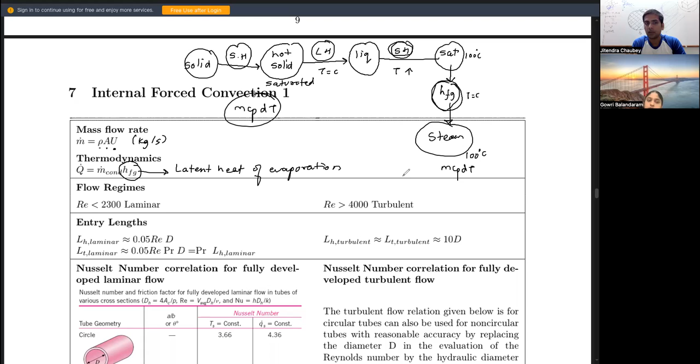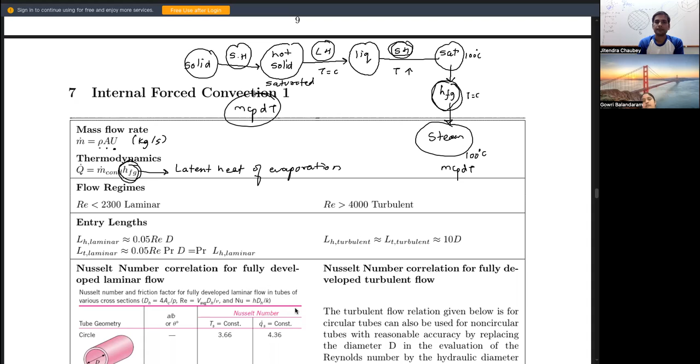Do you guys have a steam table to solve such numericals? There is a standard table called the steam table, used to find the values of HF, HFG, and HG. No, we don't have that. This value of HFG is actually obtained from a standard table. But I think maybe it'll be given during examination. No, it is usually given; most questions give us the values. So maybe they will directly give you the value of HFG.

So this was about latent heat of evaporation. This latent heat of evaporation, for 1 kg of water to convert into 1 kg of steam at atmospheric pressure, is actually 2257 kilojoules per kg.

Once it comes into numericals, we will discuss it again so that it becomes clear. Was this used in the tutorial questions? I haven't gone through them. We'll see. Since they had given the formula, I just assumed that maybe there is one.

So this is about this thermodynamic term. Then flow regimes, they have given us the benchmark for laminar flow as we discussed last time. Any Reynolds number less than 2300 will be treated as laminar flow, whereas beyond 4000 it will be treated as turbulent flow.

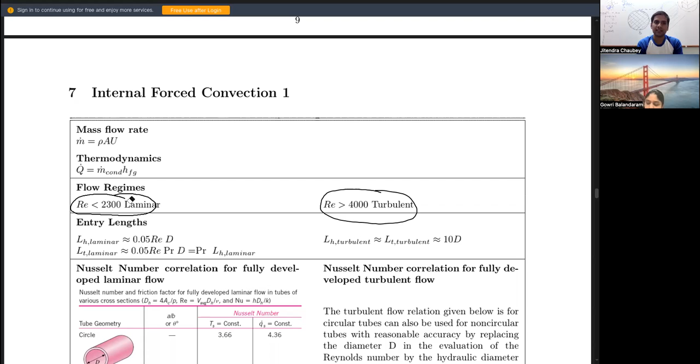Sometimes in numericals, if they mention that Reynolds number less than 2000 is laminar flow, we will consider that. But since they have given you 2300 here, I don't think they will give a different value.

This is entry length, or entrance length. The entry length is the length over which the fully developed flow is generated, where the velocity profile becomes parabolic.

So they have given us some formulas for laminar flow and turbulent flow, in terms of Reynolds number and diameter. Why have they given us three formulas? H stands for? I'm not sure.

Why have they given us the abbreviation of H and T? How do they differ? This is in the form of Prandtl number, this is in the form of... Will you be having these values or formulas in your examination? Because it's not easy to by heart them, not easy to mug up and remember. I don't think they follow exactly that, but they have formulas that you need to know.

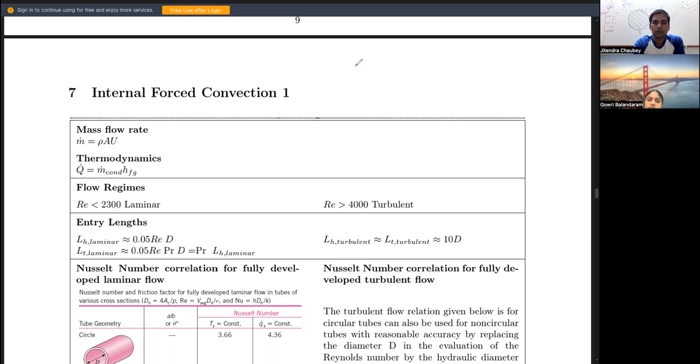Can I just show you the exam paper formula sheet? Yeah, it will be good, like more or less what it would look like. I think it will be this because it's a past year paper. Just give me a second.

This is what they gave in the paper. What I think is this H is basically for hydrodynamic, whereas T is for thermal. Because if you recall, we had discussed in the case of the tube, about the surface temperature and the fluid temperature, and then we generated a parabolic profile. Even in the boundary layer in the last lecture, we made a velocity profile for hydrodynamic, that is velocity, and at the same time we made the same parabolic profile for the thermal boundary layer.

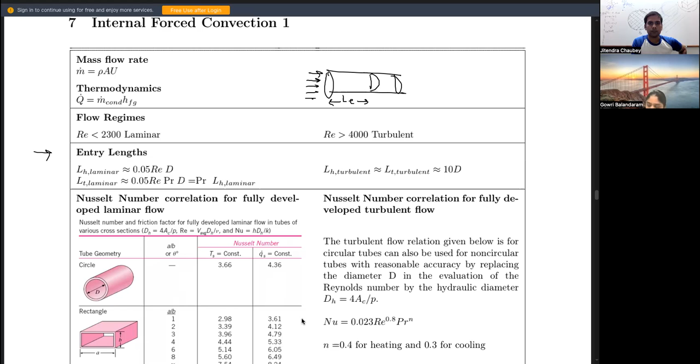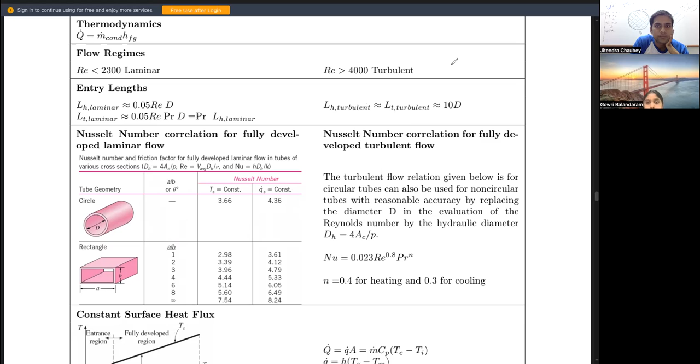So next is the Nusselt number relation - the Nusselt number correlation for fully developed turbulent flow, and for fully developed laminar flow.

Nusselt number and friction factor depend on the cross section. This is the value of Nusselt number directly given for fully developed laminar flow - it's like 3.66 and 4.36. These are the two values for a pipe with diameter D.

And then for turbulent flow, you need to remember this formula for Nusselt number, which is 0.023 Re raised to 0.8, Pr raised to n, which is mostly 0.4 for heating and 0.3 for cooling. This is the standard relation we need to use for turbulent flow numericals.

So before we use this equation or value, we must calculate the Reynolds number, Re. Knowing the value of Re when compared to 2300 or 4000, we'll know which value we need to use, and then see whether it's turbulent or laminar.

It is not that easy to remember all these values. For different cross sections, for different A by B ratios, there is a different value of Nusselt number. And when the temperature remains constant the Nusselt number is different, while when the heat flux remains constant the value is different.

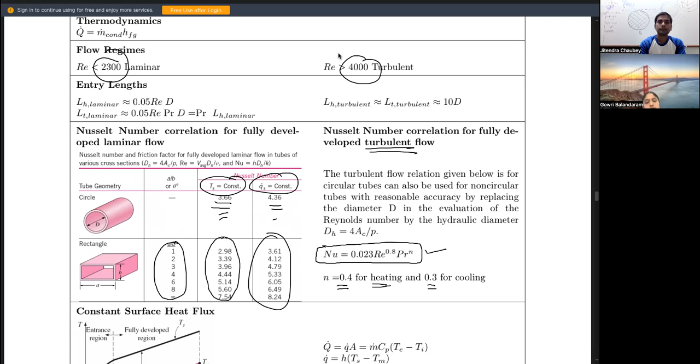So this was about the Nusselt number relation, which we need to use for solving numericals. In our university exams, they always give us this equation below the numerical, so it becomes very convenient to use. Most of the time, they directly give two equations: Nu equal to 3.66 when Re is less than 2300, and another value when Re is more than 4000.

So let's proceed. What do they mean by N being 0.4 for heating and 0.3 for cooling? N is the power of Pr. We follow the standard numbers of 0.4 and 0.3. Once the process is heating, N is taken as 0.4. Like in a pipe, if fluid flows through it and entry temperature T1 is lesser than exit temperature T2, the process is heating, so we use N equal to 0.4. This applies only to the fluid over which we're applying the Nusselt number equation.

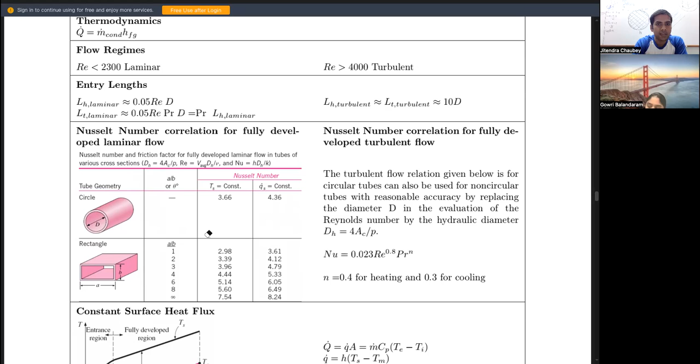So the next case is about constant surface heat flux, entrance length, fully developed region. Do you see that delta T remains constant from here to here? Starting from this point, delta T is equal to delta T at that point. So if you look at the formula Q equals HA delta T, if delta T remains constant, then such cases are called constant heat flux cases.

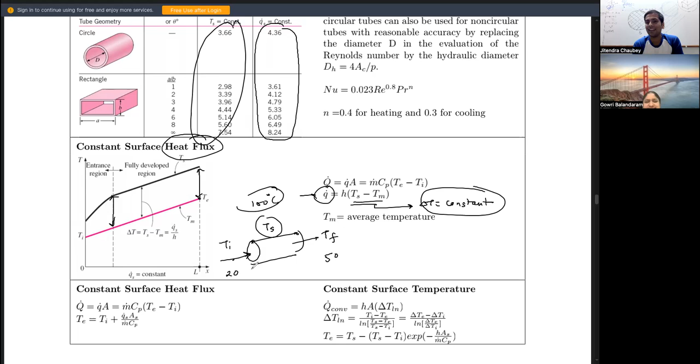Question will give us the case, we will have to understand and analyze accordingly. It will be our call, looking at the value. Delta T means temperature difference between the fluid and the surface. You can clearly see at entry Ts minus Ti is 100 minus 20, which is 80. At exit it is 100 minus 50, which is 50. So delta T is not constant. In the initial case I discussed, delta T remained constant - that's called constant heat flux. But a case where delta T doesn't remain constant is called the constant surface temperature case.

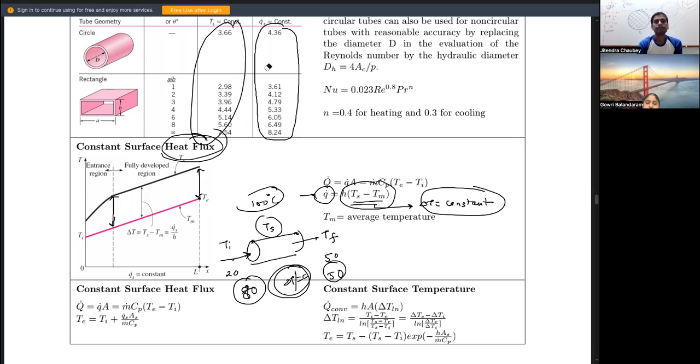So this is something we must understand and use accordingly as per the required numerical. This was about constant heat flux case and constant surface temperature case. They have tabulated the difference in the formula. In this case, Q equals mCp delta T.

E stands for? Is it initial and end? T initial and TE - what would TE be? Is it initial and final? Oh yeah, initial and final - T final minus T initial. Whenever this formula of mCp dt is used, we should always remember that delta T would be of the same fluid or same substance.

Whenever the formula mCp dt is used, this temperature difference will always be for the same substance, which is getting either heated or cooled. When it comes to the Q equals HA delta T formula, the delta T will always be the temperature difference between the fluid and the surface, always.

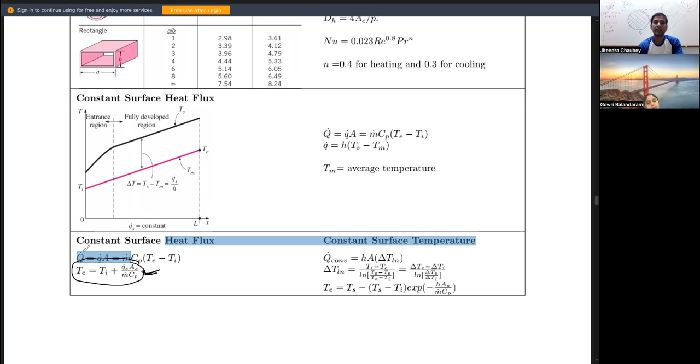Okay, I think they have simplified this formula. Yeah, they just rearranged it. So I don't know if we have to use this formula, but yes we can if you want. But remembering this formula is not that convenient. Rather, we would simply find the value of Q and equate it with this to find the unknown if required.

Okay, so what would be the difference between the formulas? Okay, they have given us the formula of HA delta T ln.

Do you know the log mean temperature difference? Have you ever seen this formula? I think so, but I cannot recall it. Okay, do you understand? I think you went through this with me a bit also, right? No, that was a different formula, that was for conduction. Yeah, that was for conduction, and look at the terminology here, it is convection.

There's a terminology called parallel flow and counter flow. Have you heard it before? No. See, but I think it's something I need to know. Let me just check, I wrote it down.

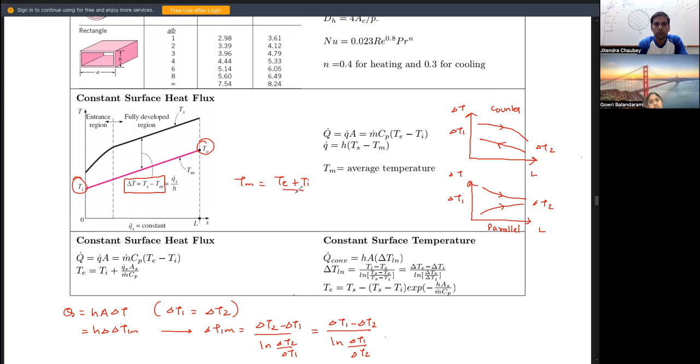Yes, the mean temperature of these two values. So T mean would be TE plus TI by 2, right? And delta T will be equal to Ts minus T mean.

So which one should we be using - this delta T or delta T log mean? What do you think? If you want a more accurate value, this formula will always end up giving you the correct value, whereas this formula will always give you an approximated value.

Sometimes the numericals are so big, so complicated, that getting the exact value is never the priority - even an approximated or average value will do. So in those cases, many authors use this formula. But in your case, if you want to use this formula at every instant, even that will do.

Or you can remember it like this: if there's a case when two fluids are flowing, one fluid flowing in the innermost path and another fluid flowing in the outermost path, then always use delta T log mean. And in another case, when only a single fluid is used and the outer temperature throughout remains constant...

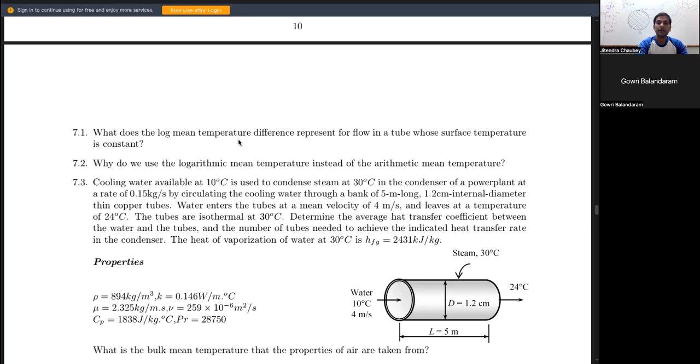Okay, what does the log mean temperature difference represent? See, they have even asked you this question. What would be your answer? What do you think? Just tell in your own words.

When you have to answer this question, always try to draw the graph which I had drawn. Draw those graphs like parallel and counterflow, then explain them about how delta T is changing.

You'll have to explain that in parallel flow, the delta T decreases continuously, whereas in counterflow, the delta T does not change that significantly, or in some cases it might even remain constant. Also explain that in counterflow, there is a possibility that the exit temperature of the colder fluid can be equal to the entry temperature of the hotter fluid, but this can never happen in parallel flow.

Then you can explain that to find the heat transfer rate for a case where the temperature difference between the two fluids is continuously changing, an average value is found by taking the log mean temperature difference.

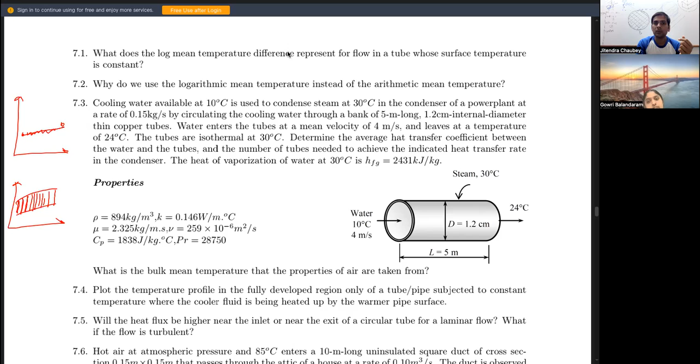But in logarithmic temperature difference, it takes the temperature difference at every instant - it's calculating delta T at each instant and then giving you the average value. This formula for the logarithmic term is obtained by taking the integration. You take a very small thickness of the tube, find the delta T for that small thickness, and then integrate it for the entire length of the tube, and automatically the simplified formula comes out in the form of log.

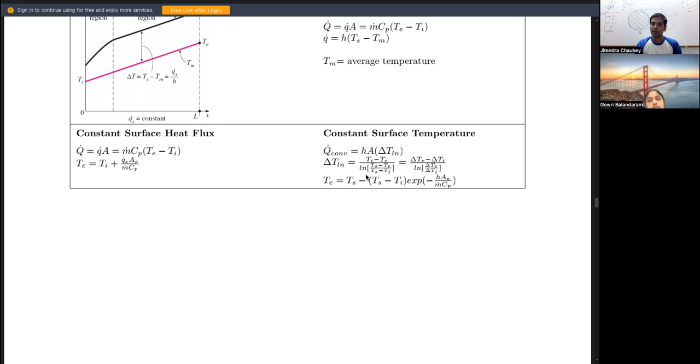So it's like taking small divisions and finding the heat transfer rate for every small division - that's why it's more accurate. It's like sampling it into small divisions, whereas the arithmetic mean is basically just concerned with end-to-end conditions. Are you getting me? Yeah, I'm getting it.

So let's go through the questions now.

Can we take a 5-minute break? Yeah, okay, and feel free to ask any question. Never just simply nod because I've completed it - there can be a situation where, under pressure, students are like 'okay, I understood,' but maybe they'll just think they shouldn't sound dumb. If there's any such case, just let me know and I'll try to explain with a different example. It's very normal if you don't understand things - just ask me in your own way. Okay, take a break, I'll be back in 5 minutes.

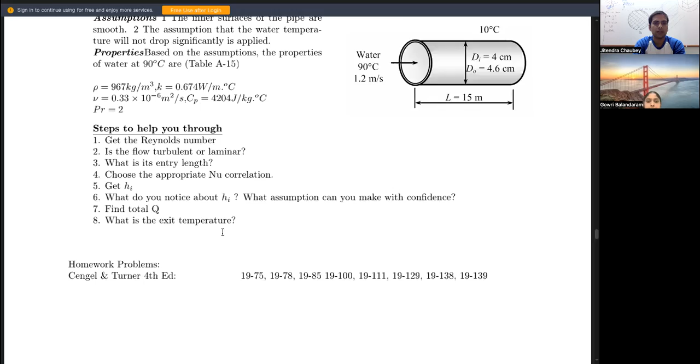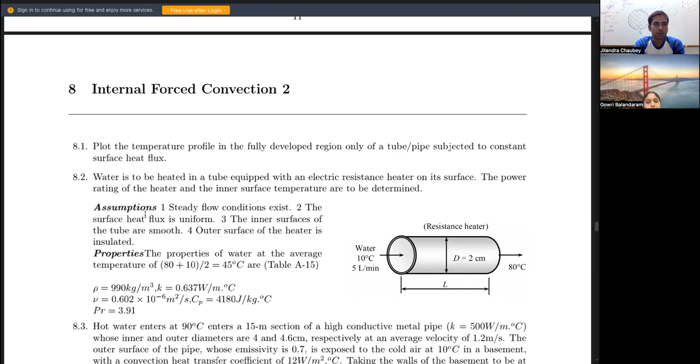I would recommend you go through all the questions, each and every question given in this topic. I'll try to go through them myself also, and then I can ask you again when I see you in the next class. This is one of the questions - there are many questions. Would you want to solve these questions or those which you've sent me?

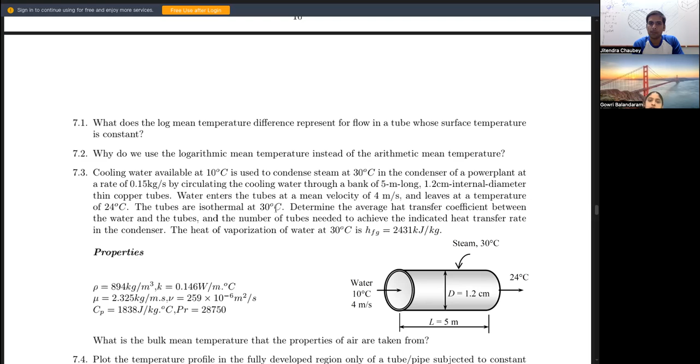I think in this case we have gone through the required formulas, and these are 2 theory questions you must be explaining. Select some more points from some notes or textbooks if you can, and if you don't understand any point, just ask me. I don't know how theory papers are there over there - here, we write point-wise answers as much as possible. It should be in limited points, not beyond 5 to 6 points, and draw a graph or diagram if possible.

Right now the exams are still based online because of the COVID situation. We have to type it out maybe, I don't think we have to draw a graph, or maybe we have to draw everything on paper and submit a copy of it.

Either one works. There are still online exams in Singapore. They are phasing out, slowly moving away, but for this semester it's still online.

How's the COVID situation over there? Still bad, I think more or less everyone has it. Lots of kids are getting it too. But schools and colleges are still going on, students are going into schools. If they catch COVID, they isolate them and they can't return to school for a while.

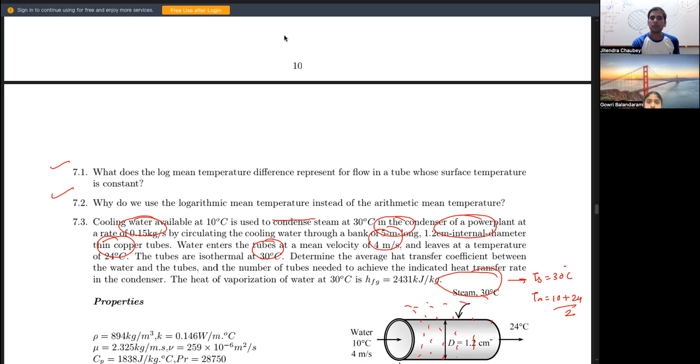See, whenever there is a case where another fluid is flowing, and if it remains throughout at a constant temperature, we can take the relation delta T equals Ts minus T mean. In this case, Ts is 30 degrees Celsius, the surface temperature is 30 degrees Celsius. The tubes are isothermal at 30, as they said, so the tube outside surface remains 30 degrees Celsius throughout every instant.

So because there's no temperature change, it will not have any temperature change. It's like steam at 30 gets converted into water at 30, it's an isothermal process. That's why we use the arithmetic mean.

If you want, you can use the logarithmic mean also, the answer would be almost the same. Doesn't matter, but this will give us the value faster. But believe me, mathematically it will not change anything, you will get a similar answer.

T mean would be 24 plus 10 divided by 2. Do you have a calculator? Okay, just tell me what would be the delta T. 30 minus 34... wait, 13? Yeah, 13. Okay, let's try to calculate the logarithmic temperature difference.

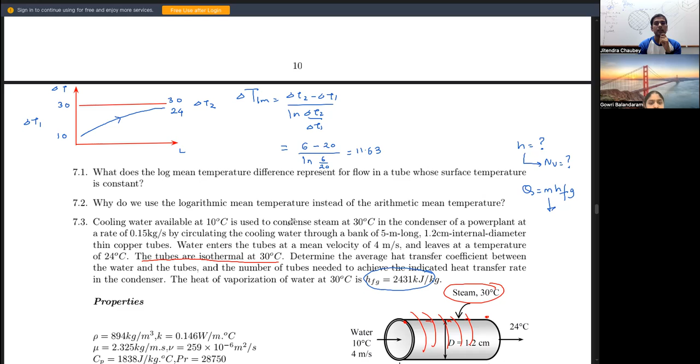Have they mentioned anywhere the mass of steam? It might be below. Cooling water at 10 is used to condense steam at 30, of a power plant, at the rate... Is it under the properties?

The question is, would this mass flow rate be for water or for steam? I think this is for steam — it is the steam which is condensing at 0.15 kg per second. You know why? Because they have given us the velocity of water, and from the velocity of water we can find the mass flow rate of water. So this 0.15 is the mass flow rate of steam.

So we can find the total heat lost or total heat absorbed by the steam by using the relation: 0.15 into 2431. Are you getting me?

Why do you take the mass as 0.15? They have given us the rate of 0.15 kg per second. So is that mass flow rate? Read the sentence: it is used to condense the steam at 30 degrees Celsius in the condenser of the power plant at the rate of... so it is the rate of condensation — every second how much steam is getting converted into water. Correct, every second 0.15 kg of steam is converting into water. So the mass of steam converted into water, multiplied by the heat required to convert it, which is HFG.

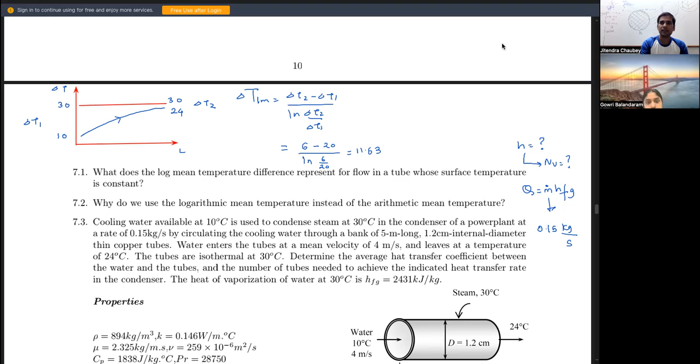It's okay. See, what are all the formulas we must be knowing? We will discuss them, and how the question flows we'll go through. Instead of solving it over here, I will prefer writing it on the whiteboard.

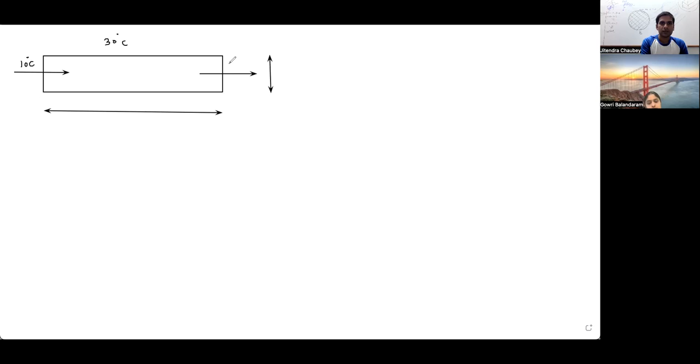Okay, so the question is, there's a tube maintained at 30 degrees Celsius. It is having a fluid entering at 10 degrees Celsius and leaving at 24 degrees Celsius. There's some length of the tube, and then there is a diameter of the tube. 10 degrees Celsius, 24 degrees Celsius, 5 meter, right?

Length of the tube was? Yes, length of the tube was 5 meter and diameter was 1.2 cm. So we will write it as 0.012 meter, right? Yeah, correct. Divided by 100. So it is entering at 4 meter per second.

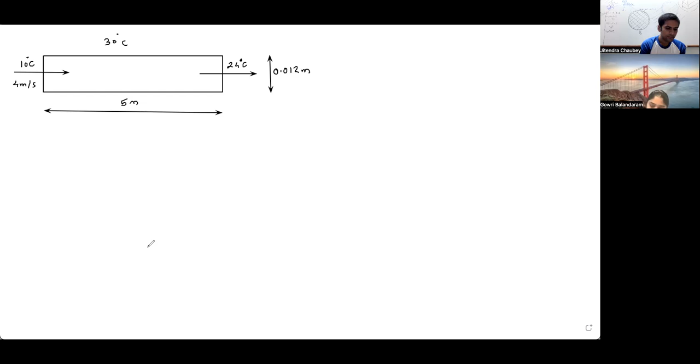We will assume it to be constant. Okay. 4 meter per second is the average velocity or the max velocity? 4 meters per second is mean velocity, average.

Average velocity, okay. So what are all the formulas we must be knowing for such a question? For convection, Q will be equal to H A delta T mean, where H is coefficient of convection, A is the surface area of the pipe. Delta T mean is the average log mean temperature difference.

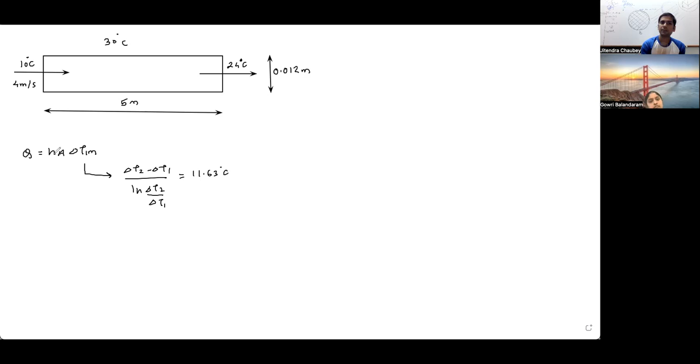It is equal to delta T2 minus delta T1 upon ln to the base delta T2 by delta T1, which we calculated. It was equal to 11.63 degrees Celsius. So if we get the value of H, we can find the heat transfer rate, or either way, if we get the value of Q, we can find the value of H. Either way, it is possible. Okay, right.

So they have given us HFG, they have given us mass flow rate of the steam. So even that formula can yield us Q. Q is equal to M...

Now Q will be written in the form of specific heat for two cases. One would be M Cp dt for water, which is flowing inside. Also, this formula can be written as M HFG for steam, which is above the pipe, getting condensed. Can you make the difference? We can use either one of them.

You can use either of the formula, where M dot would be the mass flow rate of the fluid which is flowing inside, which is water. Cp would be the water or the fluid which is flowing inside, specific heat. dt would be the temperature difference, 24 minus 10.

M HFG would be for the fluid which is getting condensed. They have given us the mass flow rate of the steam, which is 0.15 kg per second. And HFG was 2431. So this will be the total heat released by the steam.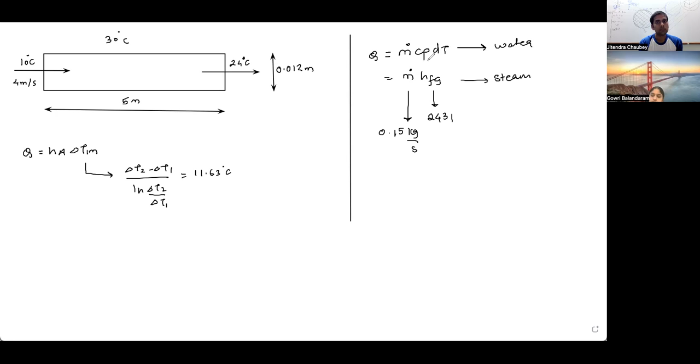This can be equated to this formula also. Okay, so should I try out the other one and see if it works? Yeah, we can. So in this case, delta T will be? This formula, 24 minus 10, 14, is it?

Yeah. Or does it need to be in Kelvin? Doesn't matter, the difference remains the same. Okay, what value are you taking for M dot? 0.15? No, this is the m dot of the water which is flowing. So this won't be 0.15. This will be equal to rho A V.

Rho they have given us. How much is the rho of water? 998, 998.7. Area would be area of cross section of the tube, pi by 4 d square. Sorry, how did you get 998?

Properties. I got 894. Hold on, I will share the value. Stop sharing, share properties. 894, sorry, my bad. Okay, 894.

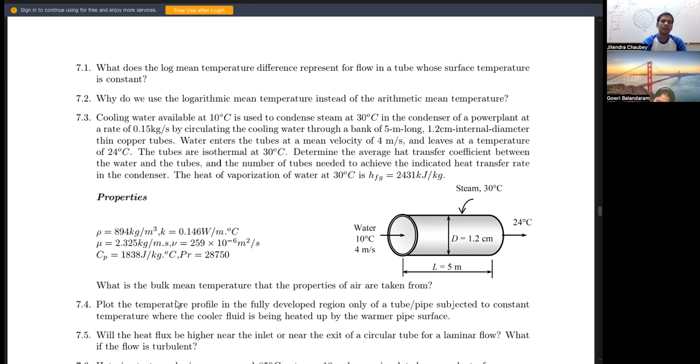So it's rho A V, right? Rho A V. CP? CP looks wrong to me. Water doesn't have CP of 1838. It has 4.187.

Something is wrong with A V, is it? Okay, I think the given data is wrong. The properties given to us are wrong. It could be there was some error when he was going through as well, the lecturer, I think, because CP of water is not 1838. It is 4.187.

Also, just look at the solution which they have given. In that solution, they have taken 4.184. And then they took, and they have taken density also 998.7. 998, yeah. Okay, so they just use their own values here in the solution.

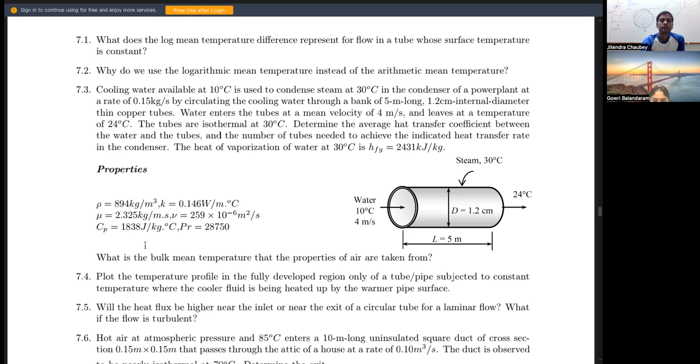998.7 into pi by 4 d square into velocity 4. How much is the value of m, mass flow rate? 18,072.

Oh, I did not change units. I'm sorry. Calculation error. Okay, just take these values. This is the density, this is the cross section, and this is the velocity.

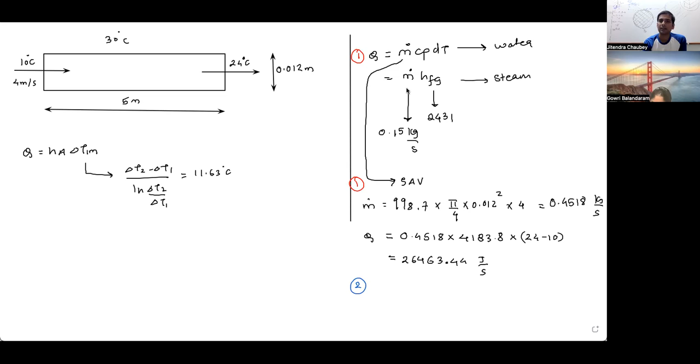Because we have the value of mass flow rate and HFG directly, we just have to multiply them. So Q for steam would be m dot HFG, where m dot is 0.15 and HFG is 2431. Now it is in kilojoule per kg, whereas this was in joule. So to compare it, I will multiply it by 1000. So now it will be also in joule per second.

Now tell me what is the value. 364,650. Joule per second.

Just compare the two values. Like it has got 5 digits, so it is like 26,463, and it has got 6 digits, so it is like 3,64,000. Clearly this value of heat is more than this value of heat. Yeah. What does it mean?

No, see, whatever heat is given by the steam is equal to the heat absorbed by the water. Correct. But still we can see that the value of heat being absorbed is much lesser than the value of heat being given. Water was flowing through. So this is for a single pipe.

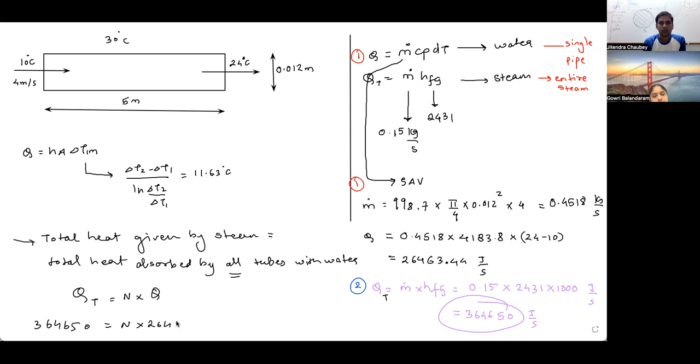So this will be like 364,650 is equal to number of tubes into 26463.44. Yeah, just calculate the N from this equation.

Tell me the value, how much is it? 13.77, that is equal to 14 tubes.

This is one of your answers. They had asked you number of tubes and they had also asked you coefficient of convection H. Now in this case, how to find the coefficient of convection? What do you think?

You need to find H. We know A and we know T mean and we know Q, so we just substitute to find it. Simple, so we have it all. All we have to do is simply just equate the values.

Which one to equate to? HA delta T LM, should it be equated to this value or should it be equated to that value? Like, should it be equated to Q of a single pipe or Q of all the steam? All the steam? No, this has got a relation for a single tube convection. It is talking about the single tube, right? How do you know it's about the single tube?

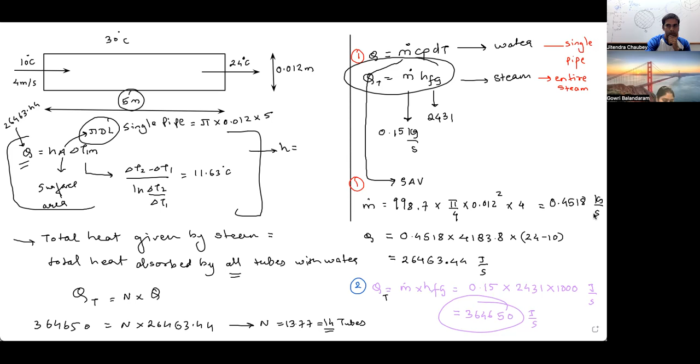Working on it. How much did you get? Still working on it. Okay, sorry, give me one. I'm quite slow. It's okay. I hope you're doing it on your scientific calculator and not your mobile.

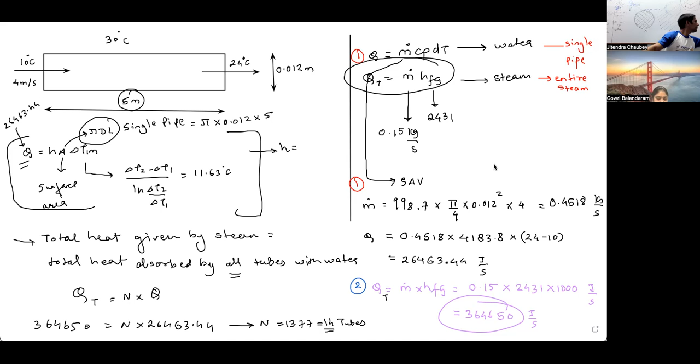No, I'm doing it on my calculator. You guys have this scientific calculator? Yeah, just a different model I think. 26463.44 divided by pi into 0.012, I got 6035.80. Am I right? 11.63, it is.

I don't think I got it. Why didn't I get it? Okay, mine is 12071. I got a very big number. Is it because I'm supposed to divide something by 1,000 or times by 1,000?

Oh no, I have already given you all the values. The numerator is 26463.44 divided by pi dl into delta t mean. Your pi dl is pi times 0.012 times, into 5, right? Why into 5? Yeah, pi dl, right? And into delta t, which is 11.63.

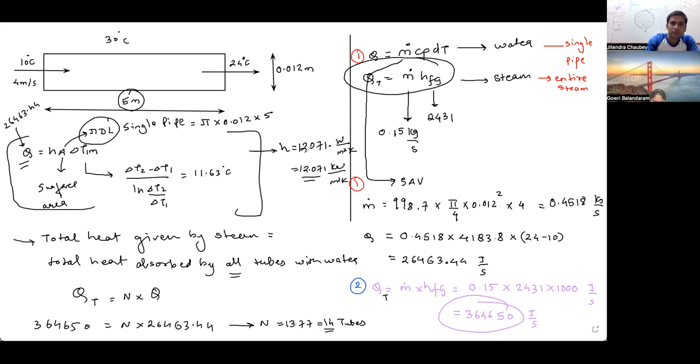What is the unit? Kilowatt per. We have also asked you the bulk mean temperature - what is wrong with these people? The question doesn't talk about air and they need to ask me something about air. Maybe they must have copy pasted wrong data from a wrong question. This entire value of properties and this line belongs to some other question.

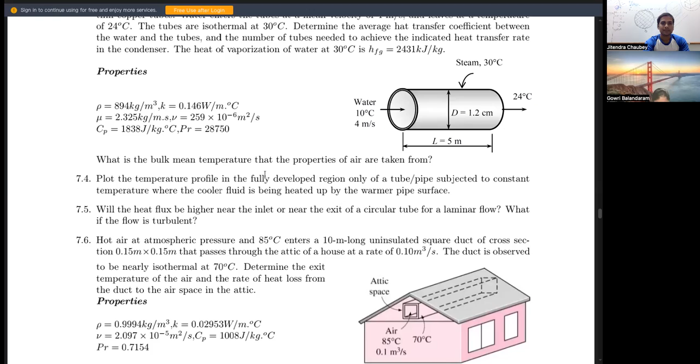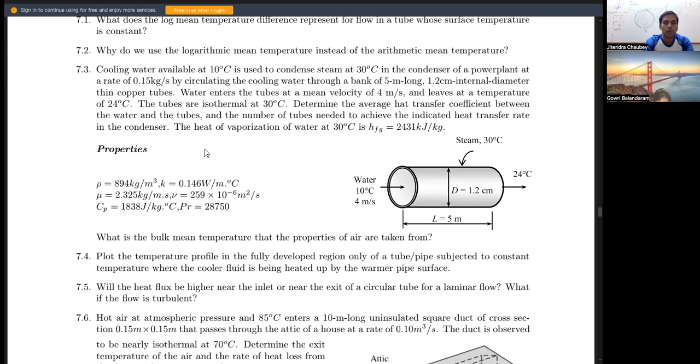Maybe it's just shifted. Oh, they edited it. It's all wrong. If you see in the solution, they have given a solution for numerical in 7.2, wherein in this case there isn't any numerical in 7.2. They must have simply copy pasted. No issues.

Let's go to another question, we can solve this too. This one about hot air. Do you want to go through this theory question? Plot the temperature profile in the fully developed region only of a tube. We have gone through this.

Yes, correct, let me write it out. Is it okay if I write out questions that I have prepared for myself, and then you just take a look and see if I'm wrong anywhere? No issues at all. Okay, I'll do that then, I'll try to get it to you by Wednesday night at the latest. Whenever it is convenient for you, just write it down and send me a snap and we will go through it to see if it's correct.

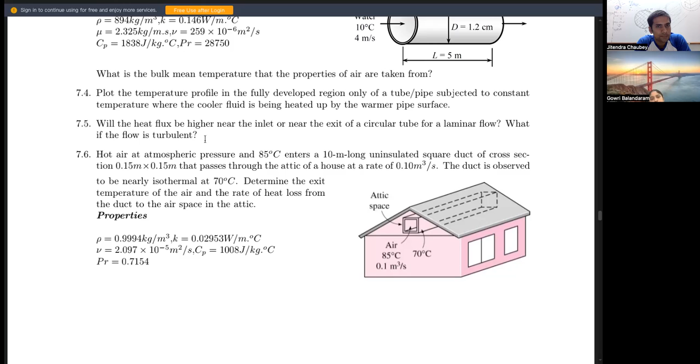Will the heat flux be higher near the inlet or near the exit for laminar flow? What if the flow is turbulent? We can do 7.6, I'll do the theory myself.

Hot air at atmospheric pressure and 85 degrees Celsius enters a 10-meter long uninsulated square duct of cross section 0.15 by 0.15 that passes through the attic of a house. Volume flow rate is also given. The duct is observed to be nearly isothermal at 70 degrees Celsius.

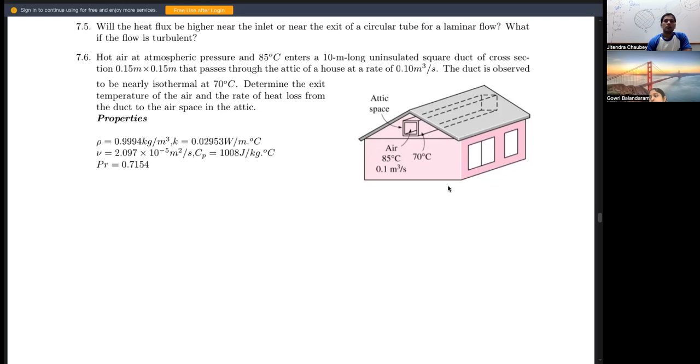Determine the exit temperature of the air and the rate of heat loss from the duct. Looks straightforward. So first I have to find Q, right? They have given us Q. Sorry, they are asking us for heat flow rate, correct?

The question shows this is the duct, it is kind of similar to the previous question. Instead of water, now air is flowing. Instead of velocity, they have given us discharge, that is volume flow rate. Mass flow rate formula is rho A into velocity, where this is volume flow rate, by the way.

So if they give you volume flow rate instead of velocity, simply multiply it by density and get the mass flow rate. The density is this much: 0.9994 into 0.1, and this will be in kg per second. Because if you simplify the units, this is kg per meter cube and this is meter cube per second, so meter cube cancels out and the unit is kg per second. These are small adjustments you will understand with practice.

So this was the mass flow rate, which is calculated. We can find delta T mean. Delta T mean would be delta T2 minus delta T1 upon ln of delta T2 by delta T1.

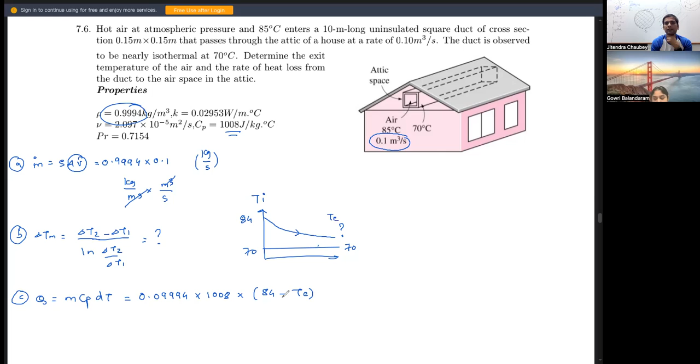0.09994 into Cp value is 1008, and dt value is 84 minus T final. If this is T initial, let's say this is T end, so 84 minus T. In this formula, if somebody gives me Q, I can find T. All I want is Q, so Q cannot be calculated by this relation.

How else can we calculate Q? Mass flow rate times HFG, or HA delta T. HFG we cannot use because in this case there is no phase change, they haven't said the air is getting condensed or evaporated outside. In the previous case, the steam was getting condensed, so we knew what was happening outside. But in this case, they haven't mentioned anything about the outside scenario, so we are left with only one formula, that is HA delta T.

H what T again? Sorry, HA delta T, the convection formula. Oh, H A into change of T, is it? Yeah, okay, so we find that.

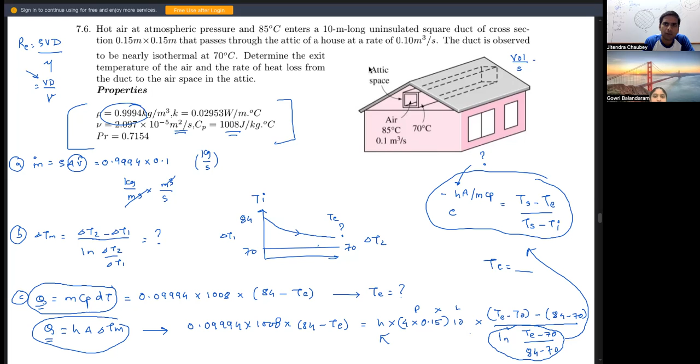Rho AV, it's AV. Mass flow rate is rho AV. Okay, that is fine, just remember that formula. We have calculated mass flow rate, right?

Let me remove the camera from here. See, m dot formula has got rho AV. It means it has got velocity inside. So even using this formula, we can find velocity, right?

So all you have to do is just simply divide by rho A. So from here we can find the value of velocity. Velocity will be m dot upon rho A.

So m dot is 0.09994, rho is 0.9994, and area of cross section is 0.15 into 0.15.

4.44 meter per second. Correct. Now substitute the 4.44 and diameter - what would be the diameter? It is not a pipe, it is a duct.

Hydraulic diameter. What's the formula of hydraulic diameter? 4A by P. You remember 4A by P? No, what's that?

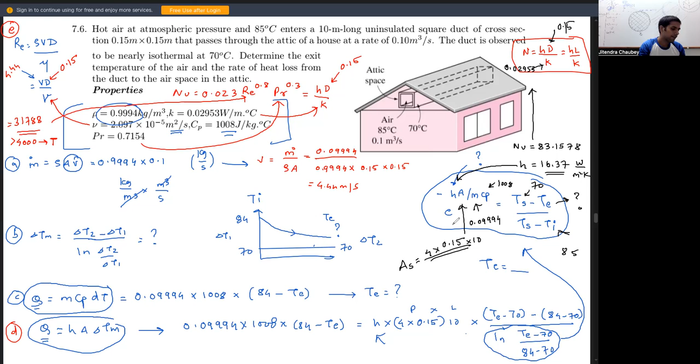0.377? Yes, perfect. Do you know how to solve for unknowns like alpha x in the calculator? No, I've not done that before. That is something very convenient, by the way.

Okay, maybe I'll just go through your calculator to see how it looks. Just take a snap and send it to me, if I can. I'll try to help you learn how to use the calculator too, because it looks magical.

I can't see it clearly. No, I haven't done that before. See, once I write this, I'll just press shift, solve, equal to 0, and it will directly give me the value of x, that is 75.

Oh okay, and the answer is the same—75.6. How did you do that? These are small tricks you must know about your calculator. Just take a photo of your calculator, and I'll help you with it too if possible.